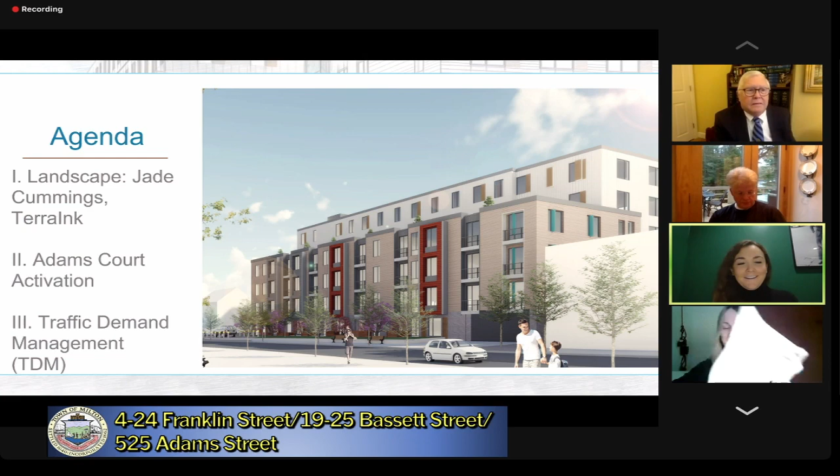Walk us through the landscape. So Jade, why don't you have the floor and tell us about the landscape for the proposed project? Okay, thank you very much for the introduction, Jen. Again, it's wonderful to be here tonight. Very excited about this project.

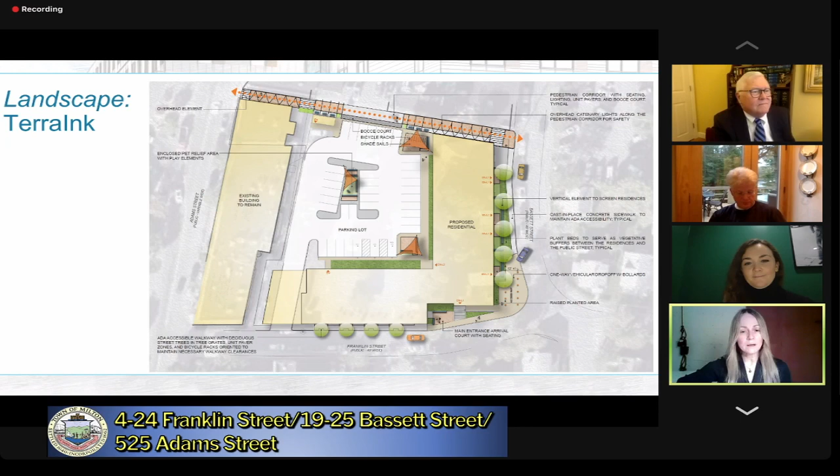I know we touched a little bit on the landscape two weeks ago, so I will review in more detail what we're thinking at this time. One thing I want everyone to understand, and Jen's been clear about this, we are so open to hearing feedback or suggestions - this is your space. This is a really critical planning moment for us to make sure we're hearing what everybody needs, knowing we can't satisfy every single person, but we really want to try to satisfy as many people as we can.

So first, we'll start off on Franklin Street. I know there were concerns regarding how narrow that sidewalk is, which it is indeed narrow - our early calculations were running around 6 feet there. But as a landscape architect, we're trying to get trees wherever we can. What we're envisioning is using columnar street trees, which are narrower and taller growing, so the branching isn't as wide as a typical street tree. We're proposing placing those in tree grates so we can maintain accessibility wherever possible throughout the project.

Continuing around the corner to Bassett Street, that's where we'll have the main entrance plaza into the building. We're dealing with some grade change in this area, as we know from the civil presentation, so we're working closely with the civil engineer and architect to incorporate an outdoor seating area, whether for the public or residents, and also handicapped access into and out of the building.

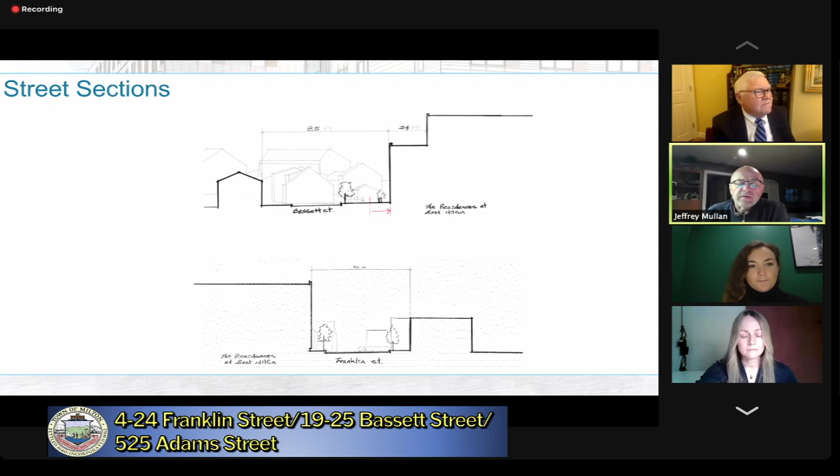So Franklin, could we go back to the image? So we saw a photograph. I don't know if it was last week or the week before of the FedEx truck. I think it was parked up on the sidewalk.

And then at the beginning there was a no parking zone there, right? Yes, that's true. And then at the beginning of this hearing, maybe it was Ms. Cummings or perhaps Ms. Corcoran indicated the narrowness of the sidewalk. I have two questions. One is, have you given any thought to some type of element along the sidewalk within the public way to

prohibit curb jumping, to actually make the sidewalk 100% usable for pedestrians? I mean, I understand that the introduction of an element to prohibit the curb jumping would tend to narrow the sidewalk, but given the choice between continuing to have an enforcement issue on Franklin versus just eliminating the ability to do that at all, I might be interested in looking at that.

A bollard or something. Yes, that's exactly what I was going to ask. If the town, if Jen, if everyone is agreeable to that, bollards would be a perfect solution. You could do a bollard, or you could also, I know in Cambridge, oftentimes instead of a bollard, they will introduce an additional bicycle rack.

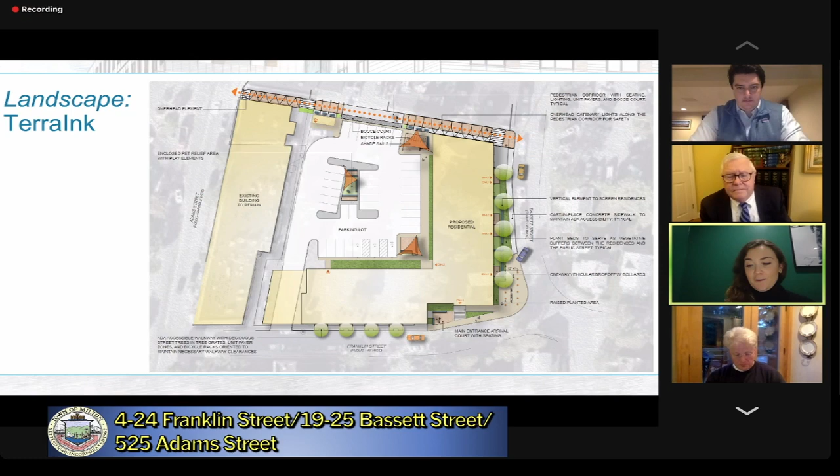So thank you very much for all of those comments. Jade, are there any fencing? Is there any fencing on the site? I'm not sure, could you speak to that, maybe, of where fencing occurs?

Sure. Definitely right now there is a fence around that pet relief area, because even though it's smaller, we have found on some of our other multifamily housing projects that even when they're small, when they're fenced in, it's just a place that the owners can quickly come out, and again, trying to take the burden off of the neighbor, having people use the neighbors' yards. So that would be enclosed to keep the pups safe.

And then along Bassett Street, we're thinking of using vegetative screening, whether it's a hedgerow or an intermittent fence panel associated directly with the residents, so that the residents on that level will have privacy. But we're not looking to fence that entire Bassett Street corridor because, as Warren said, I thought it was a really good point, we're trying to integrate. And most of this integration is going to happen at that street level. That's the pedestrian scale. That's the scale whereby we experience this place.

So there will, of course, be a taller building next to us, but how we get the tree canopies in there, how we get the fence panels, how we get those hedgerows, those seats, and the width of that sidewalk to really play, that is how a person will be experiencing the space along all of these corridors.

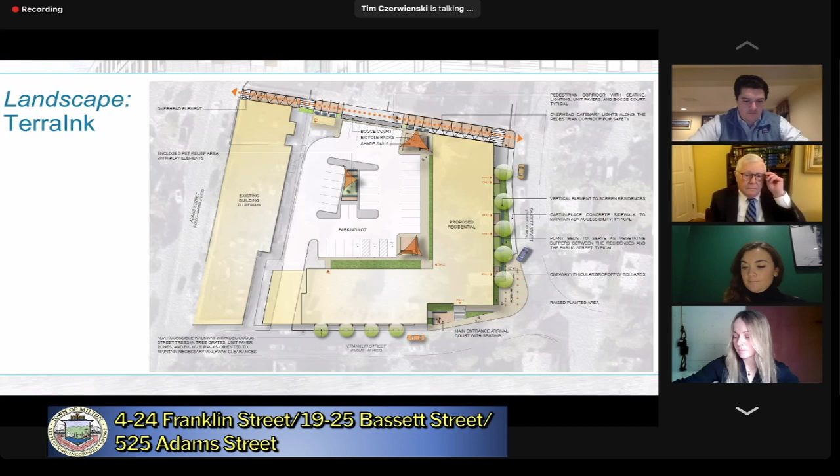But also if that grade can't be negotiated, maybe another type of activity, shuffleboard, something else, with less balls flying around. I think the concept of having some type of fun, publicly accessible activity out there is really great, and I'd encourage you to be creative and innovative in that space. I think that's something the square needs. But we also want to be careful about mundane details like heavy stone balls flying around.

That's all I've got. Thanks for the time. Great, thank you. Thanks, Tim.

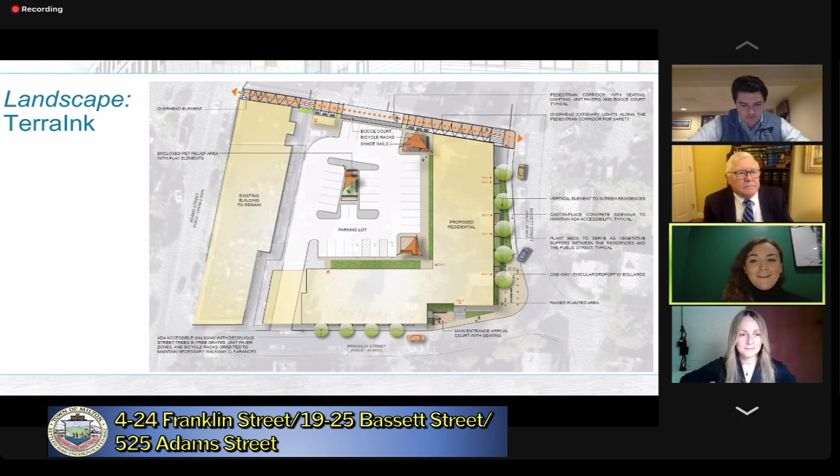But we'll move on now to the logistical planning we've been trying to do to really make this Adams Court activation a reality. We appreciated the push to get a plan in place for how to make this actually happen. And you can kind of see the grade change in the retaining wall there.

I totally see Tim's comments about the potential for that, although we'd try to make it as safe as possible. But again, bocce was just a first idea, one that seemed to lend itself to the interesting space, but something we'll continue to work on.

We were able to get in touch with the Simon Companies, who manage the building at Granite Ave for the Greenspan Companies, and we're going to be meeting with them within the next couple of weeks to discuss the plans, see what they think, and make sure that as an abutter sharing the space, they have no objections.

What we're trying to do to activate this space, at the end of the day, is as simple as pavers and lighting and maybe some seating. In terms of the physical elements, it's really a planning exercise, coordinating a space to accommodate a few more uses that can contribute to the overall experience of East Milton Square.

So once we meet with Simon, we also want to meet with other businesses in the area to make sure no one's using that space in a way that any activity there would inhibit. It's almost about creating a timeline for what goes on in Adams Court during the day right now.

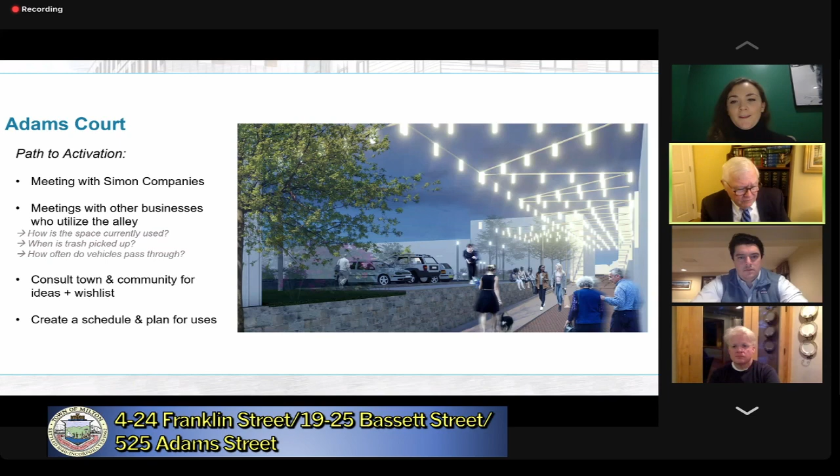Okay, let me ask Ms. Corcoran, do you have any other issues you want to discuss with the board or bring the board up to date for? Well, so we have one more slide that was just to discuss, and I know that we're going a little bit over the time that we had thought about, so I apologize for that, but I can keep this very brief. We just figured that since we had the meeting, we might as well respond, so I know that a lot of the comments last week were kind of about transportation demand and how we would manage that.

We can also provide an orientation packet to new move-ins, giving them opportunities to learn more about the neighborhood and potential walking paths. The site is not very far from Wollaston T Station, a little over a mile, which is very walkable for many people, especially those moving from a more urban area, or to East Milton Square. I know the Falcones walk a lot - shout out to them, big walking family. Walking is a really viable option, especially around here.

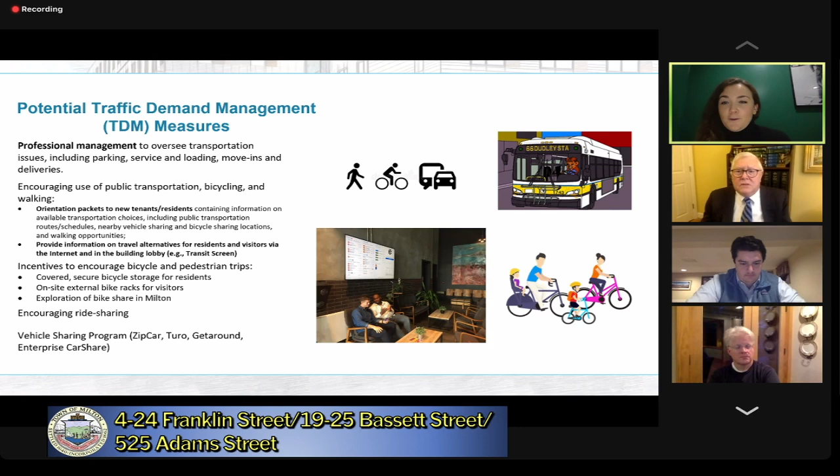Okay, that's super. Thank you. I think that's very, very helpful.

Mr. Mullen, do you have any questions of Jen, or any further items before we adjourn? No, thanks. Okay, Mr. Gray? No, I don't. Thank you. How about Attorney Riley, do you have any concluding comments, or are you content? I'm good, thank you very much. Okay, great. And Mr. Freeman, Attorney Freeman, are you all set here tonight?

I think Mr. Freeman has left it in Ms. Corcoran's capable hands. As I remember our schedule, the May 6th hearing has been canceled due to the Milton Town meeting, so the next meeting on this application is May 20th, at which time the peer review traffic engineer and site civil peer review engineer will testify, so we won't lose any time. Does that comport with your memory, Ms. Corcoran? Yes. Do you have anything further? I don't think so. Okay, we have a lot tonight, so I'll leave you with that.